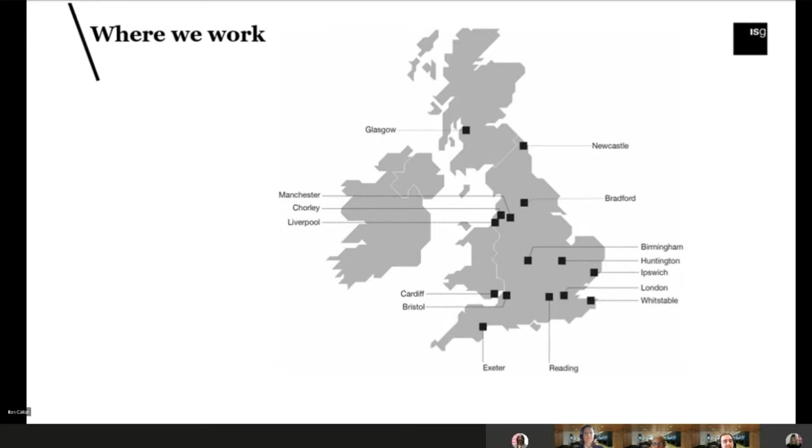So I'd like to hand over to my colleague, and I'll hand over initially to Ben, but we'll be taking questions at the end of the presentation.

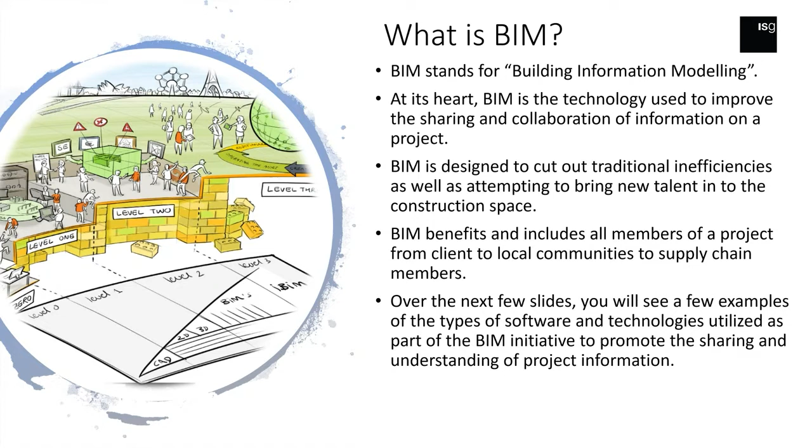So what me and Donatella are going to do over the next couple of slides is talk about some of the technology we use, how it talks with different software, the different technology we implement, and look at some of the fun side of construction. Construction isn't just this idea of muddy boots, concrete and bricks. It's developing into something a lot more technological, a lot more digital. And what I'm hoping over these next few slides is we'll try and showcase that. So Donatella, if you wanted to just kick us off.

Yes, of course. So as said before, we are trying to collaborate quite a lot with all the people that are in this construction process, and this is really the first step for us. So we are trying to design in a smarter way, definitely smarter than before, when we were using just papers or just 2D. And this is one of the main software that we are using.

That is called Revit. This is authoring software for design. So we put together the walls, the ceilings, the floors, and you can set up different things - the thickness of the wall, the levels, how many levels you have in a building, how they come together, and then you can always look at it in 2D and 3D. I think this is the magic of this software, because all the time you are drawing something in 2D, you can look at it in 3D and have a more comprehensive idea of what is happening in your design.

And this is a big revolution from the previous traditional design. Also, this is used as a collaboration tool, because more people can draw something in the same project. So we can have different files, and different files can work together in a smart way. They can synchronize with each other, and it is really working.

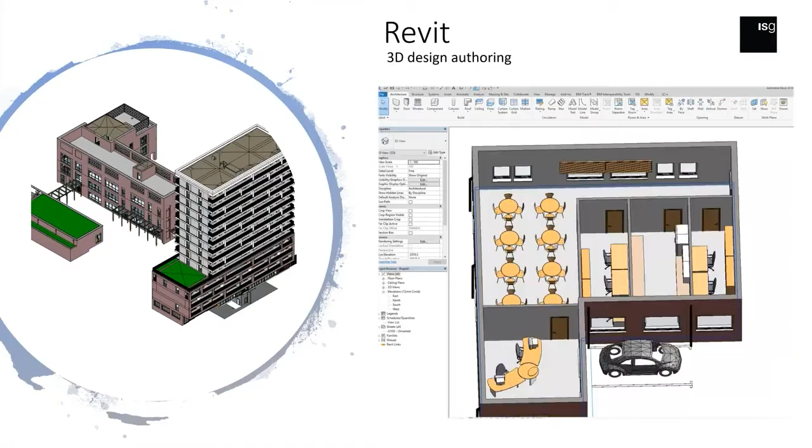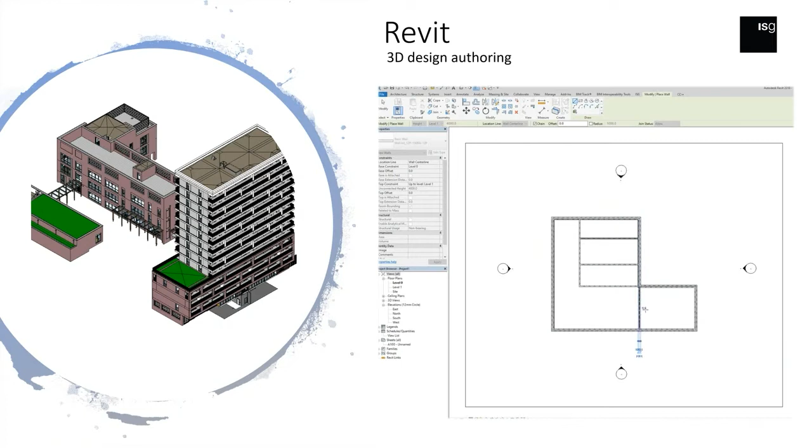We are trying to keep it up, the work in progress with these models. We share it with the whole team every week, so all of us are informed and there is not so much loss of time in the sharing, because before you had to post the 2D drawings or the big papers - on Friday you'd spend 2-3 hours just putting together everything on paper and posting it out. Now we are in a place where we can share all this information with a couple of clicks and 10 minutes of transfer.

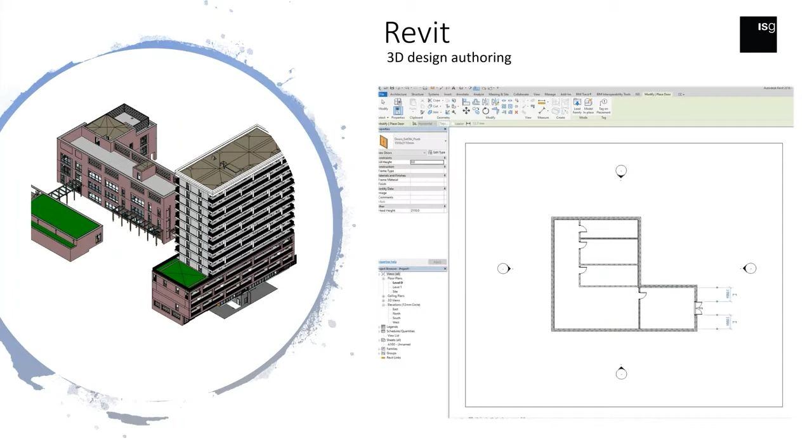And what else? Do we have anything? The video is finished. No, the video just plays more or less. I'm waiting for... do we share, do we show the 3D in this video? Yeah, it does, it drops at some point. It drops. Yeah, we get there. Yes, sorry, what were you saying?

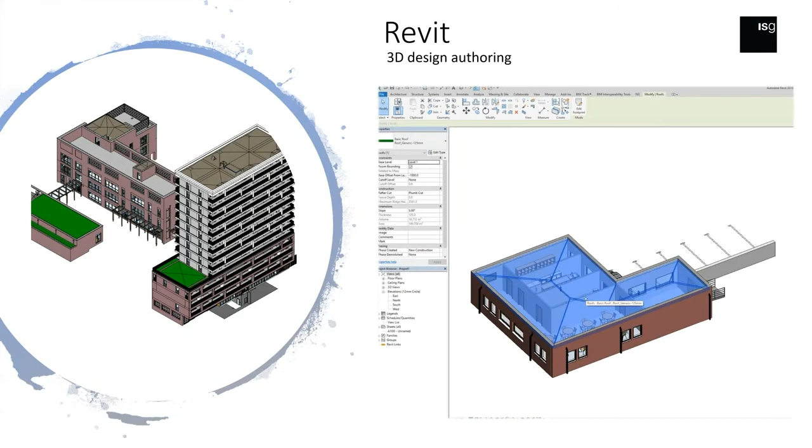I think it's also worth mentioning that we're showcasing this specific piece of software, Revit, and it's not to say that it's just main contractors that use this. Traditionally it's designers, so it can be architects doing the external look and how the internal feeling of the building is represented. It could be used by structural engineers to design the structural elements, how it stands up, how it's designed so it doesn't just fall over in a strong breeze, or how we can get mechanical and electrical consultants involved as well, looking at things like heating, lighting and ventilation. This is a type of software - I'm not saying it's the only one, there's loads of other software out there, but Revit is a typical example of how we can utilize 3D and 2D information to better visualize the project.

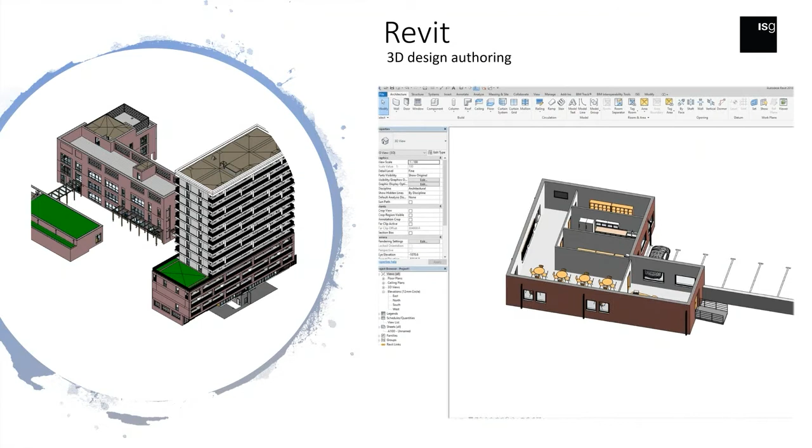And what the video was showing was essentially how we were drawing in the 2D space. However, at the same time, we're drawing in that third dimension as well, which opens us up to additional and a lot more capabilities around how we can use this information.

This is something that will come out later in the presentation, but we'll show a lot of software, and basically we have to learn different software and how they work with each other. We're showing this software because it's the most used for building, but if you're designing infrastructure, a long bridge or road, there are other products more applicable or most used in that industry. So the beauty of this is that we have to learn a lot of software, we're always learning something new. It's very challenging, and the fact that they work together in different ways is something we need to learn and understand. I found this one of the most fascinating things in this digital world. A big challenge for us, but very interesting.

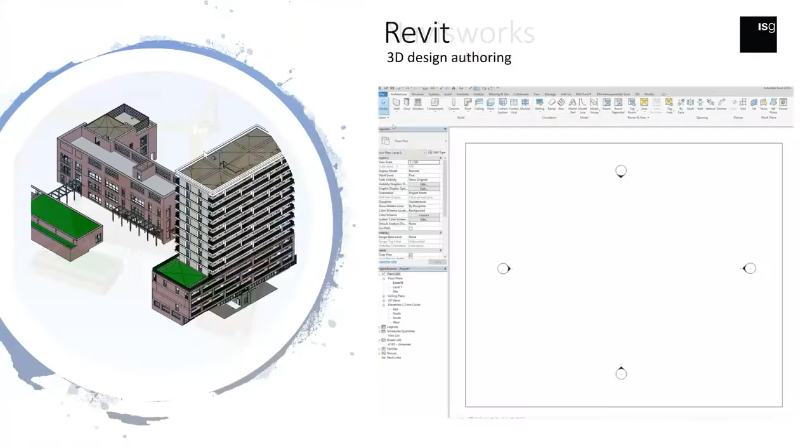That brings us on to, so Revit is predominantly the tool for how we can design in that 3D space, but then what we start to learn is how we can utilize that 3D design, that 3D information, that third dimension moving forward.

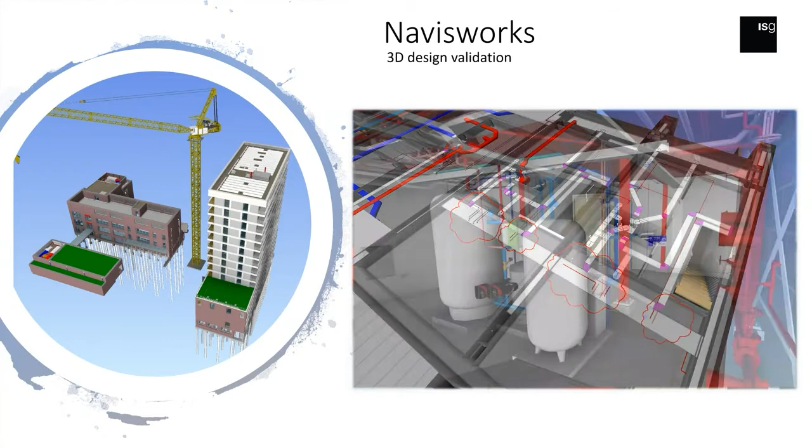Going back to the different disciplines on the project, you could have an architect producing a 3D model, a structural engineer producing a 3D model, a mechanical and electrical engineer producing a 3D model. You could have 10 or 15 different supply chain or subcontractors producing a 3D model. And what we're able to do is, like a big jigsaw puzzle, a 3D jigsaw puzzle, stitch that together to get a full view of the project.

This piece of software here, Navisworks, it's a little cartoony looking, but it does offer some benefits. We're able to take all the individual models from all the different parties on the project and stitch them together like a big puzzle. What you're looking at on the left-hand side is actually a series of lots of different models from all these different parties, and we're able to bring it together into one single space, this one single project.

So we've got this one single space, this single source of everything relating to this project. And what we're able to do is actually, utilizing that third dimension, fly through the model. Unfortunately we haven't got a video, we've got a series of images just to portray this, but we're able to fly through this model and visualize the design in 3D.

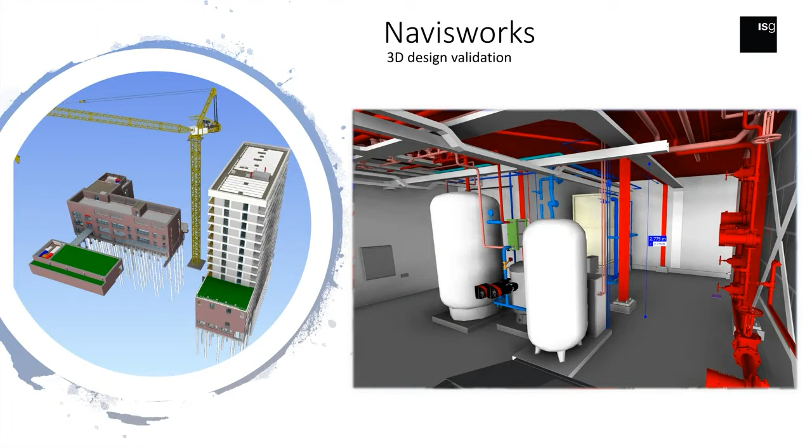Now, if you can imagine, not everybody on a project is proficient in reading drawings, understanding how buildings are made, or what certain pieces of equipment are. Certainly with our clients, trying to design with them, to develop the project with them, to get them to interpret and understand what they're physically going to get at the end can be quite tricky. So what we're able to do, utilizing this software Navisworks, is bring all the information together and visualize the design in a 3D space.

This 3D design, we can then go in and interrogate, query bits and pieces, raise issues and say, no, that shouldn't be there, it should be over there.

So what we can do with that is highlight back to the designers who are designing the pipe work and say, Mr. Engineer, can you drop your pipe work to run underneath that beam, or can you move it in a different position?

And what it enables us to do is interrogate in that 3D space and really get into the finer detail of looking at everything in one area, one space, one model, one project. People are a lot more receptive to understanding the third dimension than they are perhaps the 2D, which is the traditional 2D layouts, 2D plans, drawings that most people are familiar with on a project. So that's a key technology that we utilize.

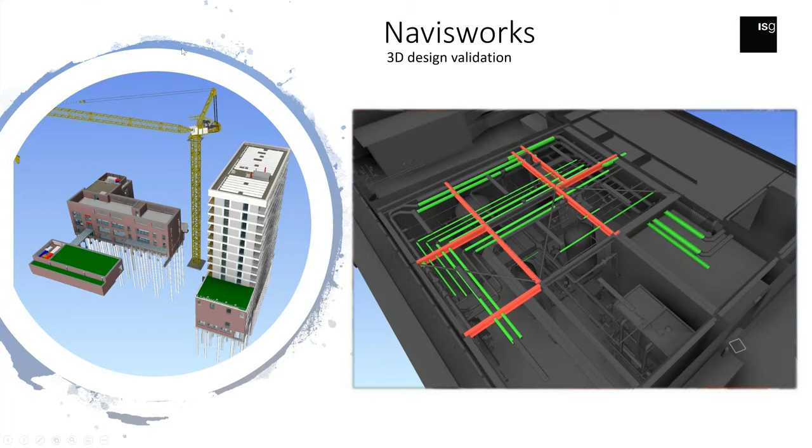Okay, so in terms of program, the program is the time program, where we do have a planner per each project putting together a time program for the project. Before, there was really a very big graph with bar graphs. And it's still kind of difficult to understand to me.

I mean, it's not difficult, but it's still like a lot of bars and you have to read through it. But if we put together what we call 4D, where the fourth dimension is the time, we use the 3D and try to put together the time with the 3D, assigning to each part of the building a specific construction time. So if we know that on that week we are going to put the pile down, we assign this in the 3D. This software is called Synchro.

This is allowing us to put together the program with the 3D. When we assign the set of objects to this time frame, we can have a video showing us how the elements are coming together on site. This is a brilliant tool that we are using also for logistics.

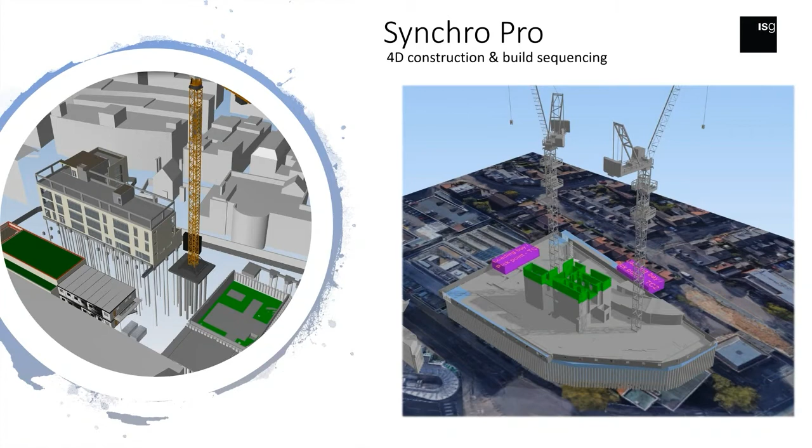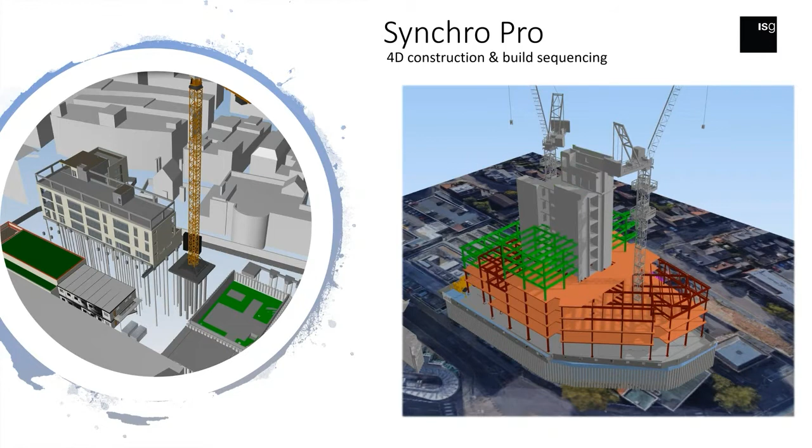So you have been seeing that there are cranes in here. There is a big operation for us on site that's written on the program, but on the bars it's not really coming together -- I mean it's there, but it's not that understandable. And then we have a lot of spatial clashes that in the program are not really something calculable. We have other plans going on too -- we can assess how we get into the site, if there is a lot of traffic, how we can make sure that all the tools are fitting, all the plants are fitting, that they can turn around.

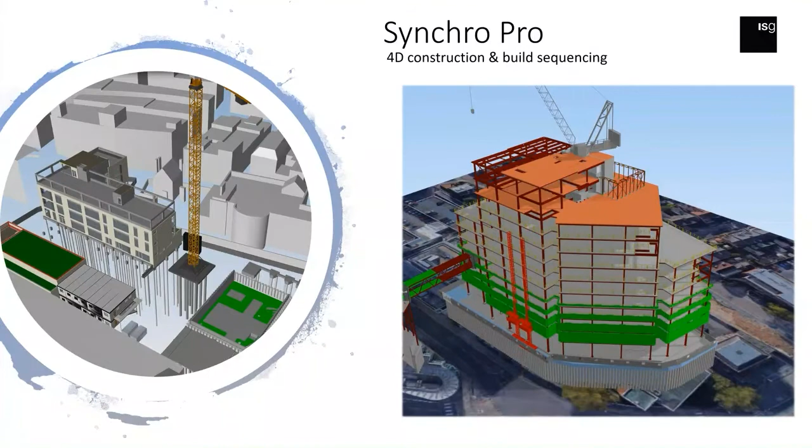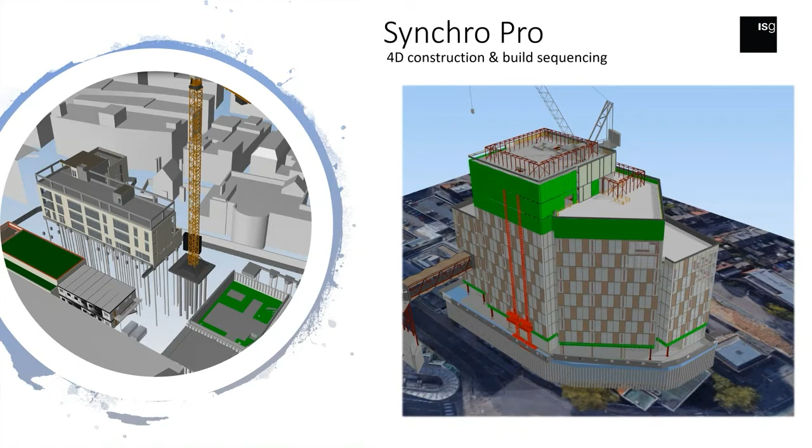We have enough space to store the materials around. We build up this video where we can see what is working and what is not working. Sometimes we have a spatial clash that we look at -- it's in the program but you don't see it because it's not evident. But with the video in place, all this perception is changing completely, because you see it, you look at it, and you understand it in the first place.

Either for the client, this is a very important tool, because there is a typical case where the bar graph doesn't say anything to us, but then when we show all our stakeholders this video, also the neighbors -- we use it a lot for neighbors -- to explain what is happening, why we are making all this noise on site, why you see all this material coming in and out.

We are very happy to show this and share it because it gives a great understanding of what we are doing, and we are working quite hard to make it right. This is a typical thing that clients really like to have, and it allows us to do our job a bit better.

I think the last bit about the 4D is not that easy, because the video and the technical bit is easy for us, but putting together all the needed information is a long operation, because we need a lot of input.

We have a planner working on the time program, but this is just a set of different information. How many plants do we have on site? How many people do we have on site? How many subcontractors are working on site at the same time? Each subcontractor will have a different time program. So actually we are putting all this information together.

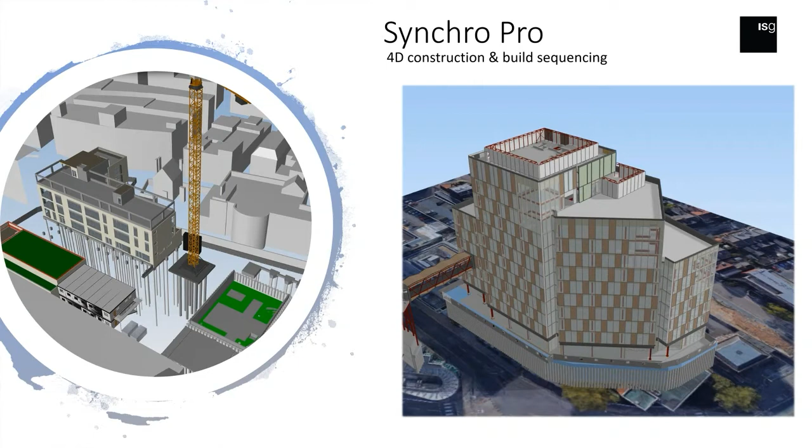The next piece of software we utilize, and some of you might recognize on the right hand side what that building is, is called Autodesk ReCap. This is a very intelligent, smart process, but essentially what you're looking at on the right hand side is a combination between the 3D model we showed earlier, the federated model, and what is called a point cloud scan.

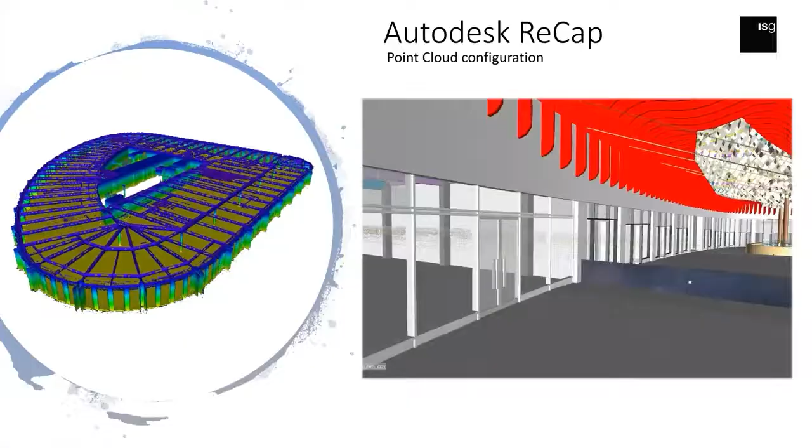A point cloud scan is essentially a build-up of what you can see on the left hand side there - sorry, getting a bit pushy pulling people around the screen. What's on the left hand side is actually a build-up of millions and millions and millions of small points. Each point is a pixel basically, and it's a build-up and a way in which we can capture on-site conditions.

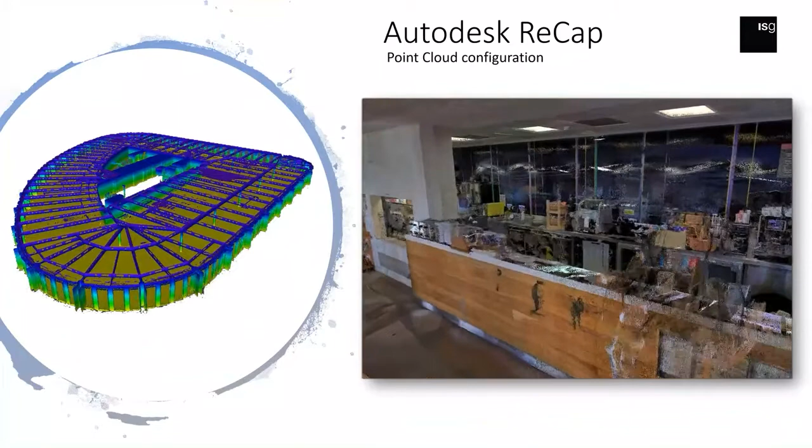To put it into perspective, a main contractor such as ISG might win a project from a client whereby we have to go out and fit out an internal space. When we say fit out, we mean that the structure has already been installed, the facades, so the glazing and the windows has already been installed, and the main structural core in the middle, the structural frame, has already been installed. So then we just need to go in and do the internal fit out - putting up walls, doors, furniture, installing floor finishes, ceilings, that sort of stuff.

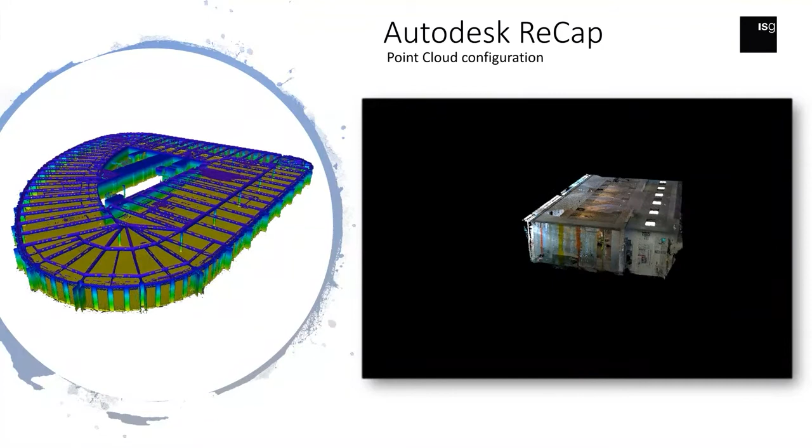What this software enables us to do is go into a building that we haven't built. We don't know how it's been captured. We might not necessarily have the information from the previous contractor who built it, but it enables us - I'll just replay that video again - it enables us to go in and capture a live representation of what that building is.

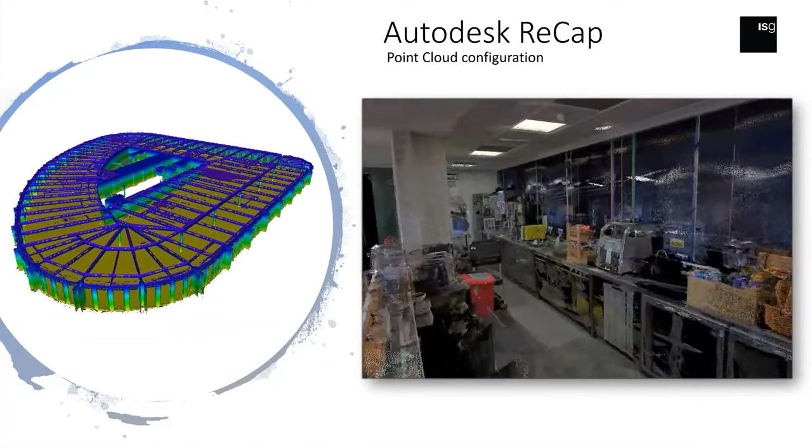What we're able to do with that is base our design upon the point cloud we've produced, because we know the point cloud is accurate, since we've gone out and picked it up and scanned it. It enables us to be a lot more accurate and have a lot more assurance around what we're designing actually going to work, because we know that's what's been captured on site.

Now, the actual technology itself, the process you follow, and what's shown on the screen on the right hand side is actually our canteen in the Aldgate office that we went in and did a scan of. The actual process is you take a tripod with a laser scanner attached on top, set it up and click go, and then for 5, 10, 15 minutes, however long, it will spin on the spot 360 degrees and shoot out lasers.

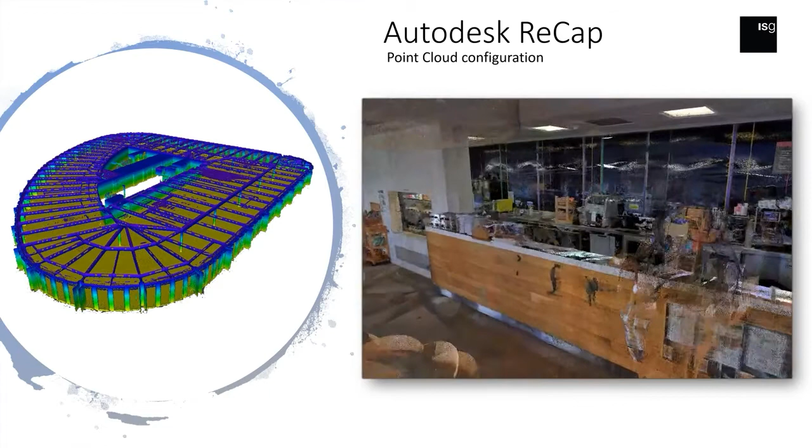And what it will do is it will calculate the time it takes between when it sends out the laser and when it bounces back after reflecting off a surface. And that's how we build up this mass of points.

So this scanner is spinning around 360 degrees and shooting out all these lasers, and we're starting to build up this mass of points, this point cloud data. Eventually we do enough scans and we get to a situation like this one here, where we can build up and actually capture a full scale scan of the building.

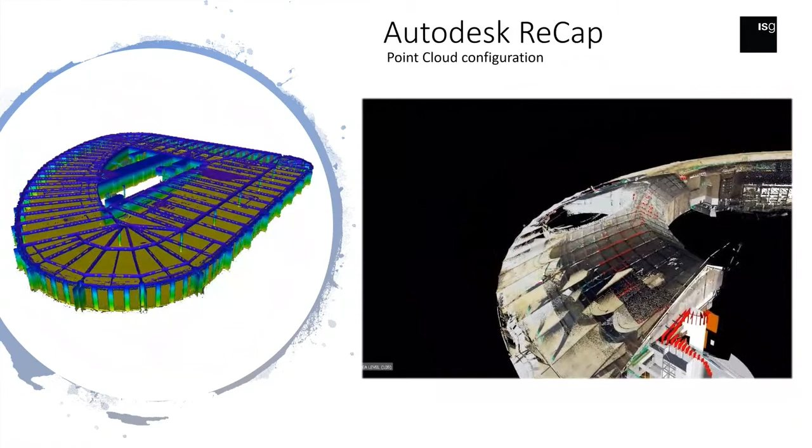Now on the right there is actually the second half of the O2. ISG did the fit out for the retail side of the O2 building, which some of you might have seen. As we're flying through, if you've been there, you'd recognise we've got these massive structural supports holding the canopy up.

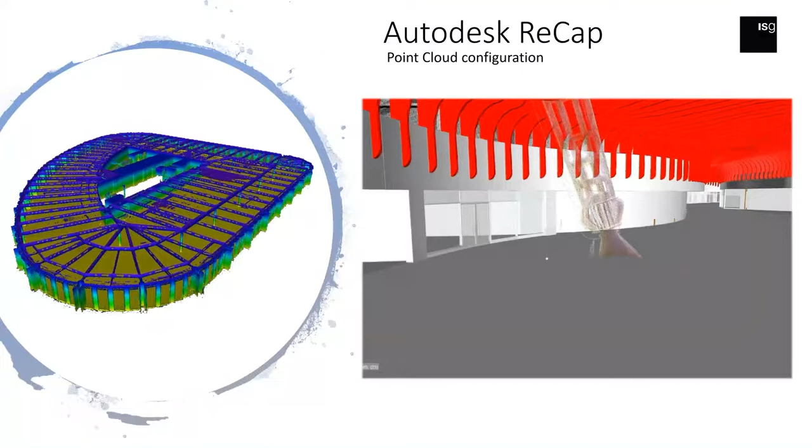What we actually did is we went out and scanned it, and then we were able to implement that into the model, and design around where these structural supports come in, giving us a lot more certainty. We do this exercise during design so that we don't have to do it during construction, so construction can go a lot more smoothly and be more streamlined, picking up a lot of these issues during the design phase.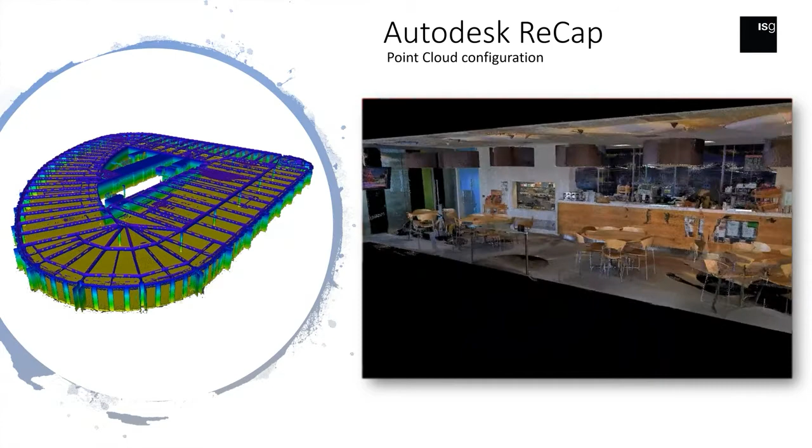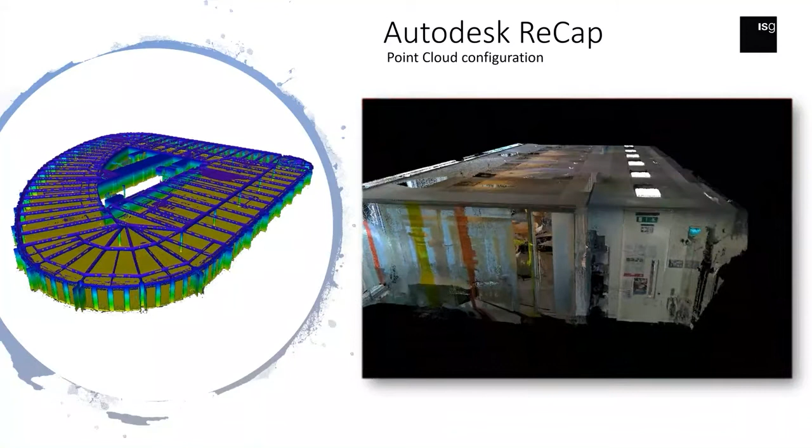It's a very intelligent piece of software, a very intelligent process for utilizing this information, to the point where a laser scanner itself can cost anywhere between 30 to 80,000 pounds. It's not cheap equipment, but we do have that in-house at ISG, and more companies are starting to realize the benefit of this technology because it saves time, saves cost due to potential changes further down the line, and it's easier to interpret.

So it's not just software to visualize what's already there on site, it's there to develop the design, make it better, do multiple iterations of the design, and ensure that what we're actually designing is fully aligned to what's on site. So again, we're getting to that construction phase and resolving issues before getting to site.

This is again a bit of a gateway. There's loads of other potential use cases for this type of information. The point cloud itself we're showing in its quite basic form, just overlaying it in a model, but there's a lot more intelligent stuff that goes on behind it as well. So there's a massive industry for this sort of stuff, and it's almost created a new role in itself.

We traditionally have surveyors that go out to site to set up certain bits and pieces, but in the last few years a new role has emerged, a laser scan engineer or laser scanning surveyor, whose primary job is to just go out and laser scan buildings. There's a lot of processes and the way you scan that needs to be considered, like it doesn't deal very well with glass or reflective surfaces.

So you have to take that into account. You have to move around the building, and work out how best to stitch all the laser scans together like a big jigsaw. So it's developed into a new role itself, which is quite an interesting concept, and it's being utilised constantly throughout the business now. But it's something that's only come into fruition in the last 5 years or so.

I think the software or technology has been around for a while, but actually utilising and implementing it within construction has certainly picked up in the last few years, because we're also talking about millimeter accuracy here. When we capture these conditions on site, this building, we're capturing it as accurately as 1 or 2 millimeters, which is tiny, absolutely tiny.

So it's very accurate information, and people are starting to jump on that, because for the sake of getting somebody to go out and scan it, we're actually saving money down the line. We're spending a little bit of money at the beginning of the project to get this information produced, stitched together and overlaid in the model. But then we're not spending money 6 months, a year, or 2 years down the line when we come to construct the thing, because we've already validated what's on site.

Anything to add? Yeah, a little things. I wanted to say that from the software point of view, we are showing this ReCap - ReCap is the software we use to see and look at the point cloud. But the technical software the guys use for laser scanning, to open the point cloud, put it in the right location, and set up the coordinates, etc., are other software. Sometimes they are specific to the machine being used, and sometimes there's other software for setting up the point clouds. Again, we have a lot to learn there - it's a proper job, a proper career in laser scanning.

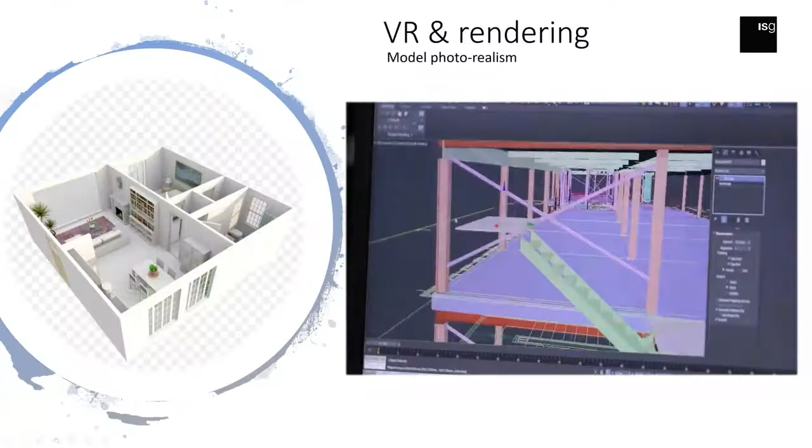And on to another interesting bit. Donatella, do you want to run through this? I would say this is the coolest part. I'm happy to have it.

So virtual reality - I'm sure most people on the call know what it is. You've probably seen people wearing the goggles, looking at black stuff, and actually being in another dimension. I think there was a need for the client or users to understand how it would feel to be in this space, whichever it is - a school, a hospital, a leisure center, as you can see.

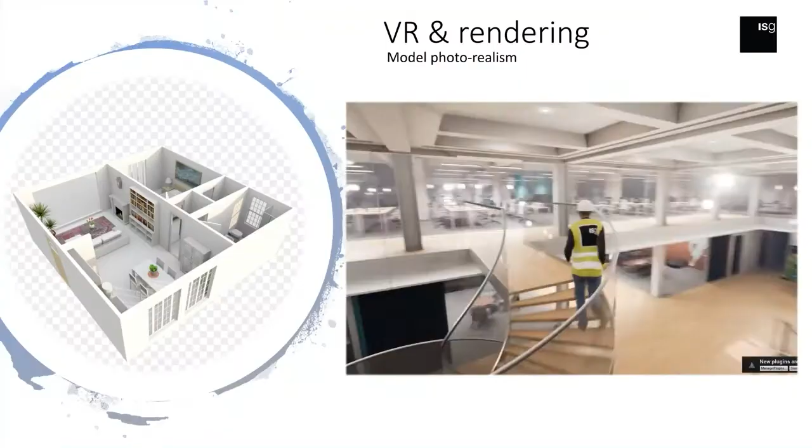Clients and users, future customers, were asking: can I walk inside? Can I touch the kettle? Can I move in the kitchen to understand how it works? Can I be on the balcony to see the panorama for real? And the answer really is - yes, you can.

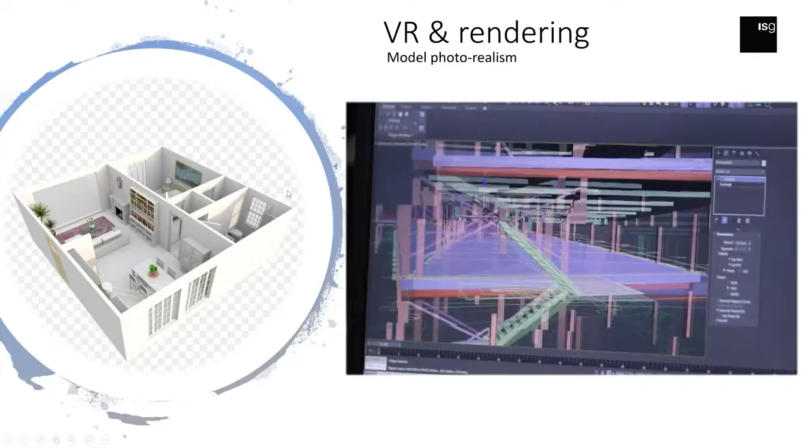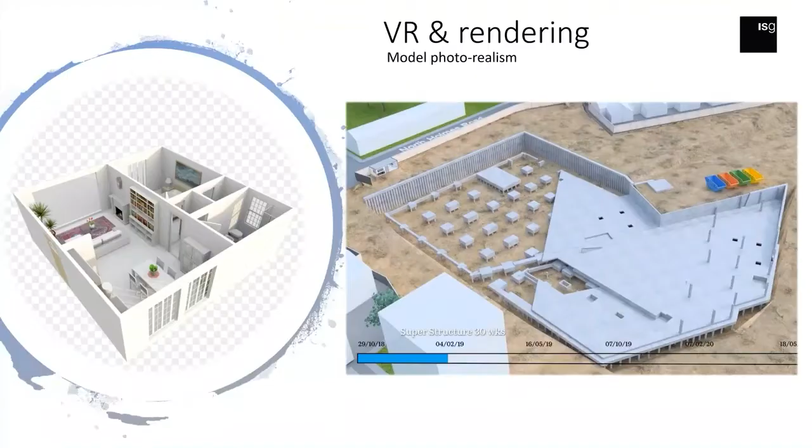So we take the 3D we created for the project and put it together. We actually make this walkthrough - but it's not just a walkthrough. We make the texture nice, make sure the colors are right, and this really gives the client the feeling of being inside the space, inside the built environment we're going to deliver. It's a fantastic tool for them to understand if they like it, and at the end of the day we want them to be happy with the space we're creating.

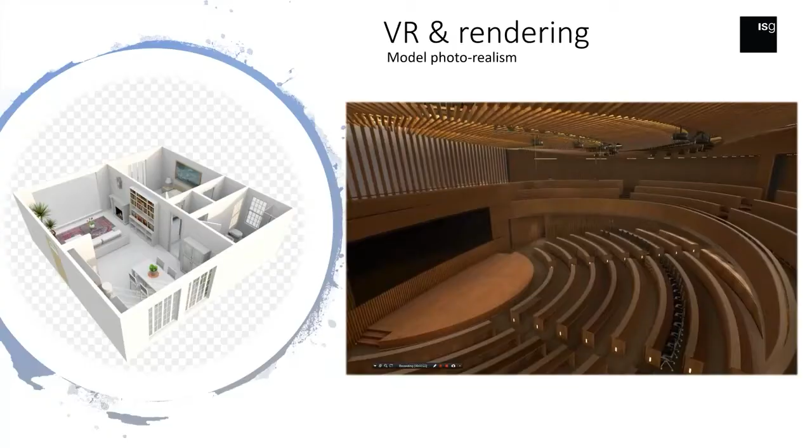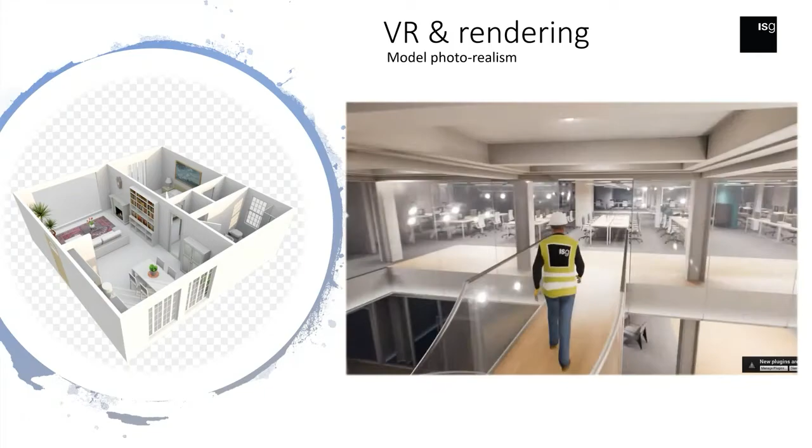This is like fit-out, a specific case where we want to make the client happy to be there, to live there, to use the spaces. With schools it's the same - we want the kids to be happy about having yellow on the wall, rather than black or dark gray. There are situations where we want them to use the space and be happy.

In technical terms, we're using different software again - usually gaming engines where we put the 3D model. It's not us specifically, because we're more about managing the process. We're not creating the virtual reality, but another part of our team is. They take the 3D models that we or the designers create, and they put these into the gaming engine.

Do we know which engine they're using? Yeah, the examples showing on screen at the moment are derived from the Unreal Engine, which is already pretty much all pre-programmed in. It's just a simple case of dropping the models in, putting on a few materials and textures, and then creating some interactions.

This jumps back to something we talked about earlier - these new and emerging roles are actually finding a place within construction. We at ISG actually have games developers employed through ISG for this exact reason. The world between construction and game development is obviously massive, but construction is starting to see these similarities and links between the two, and we're starting to utilise this.

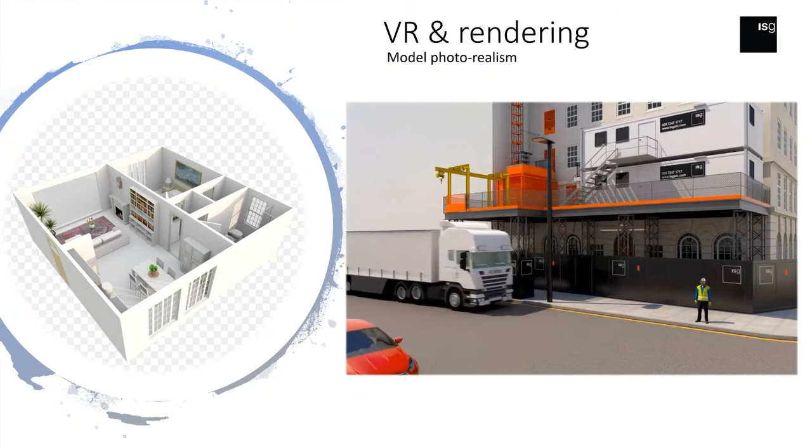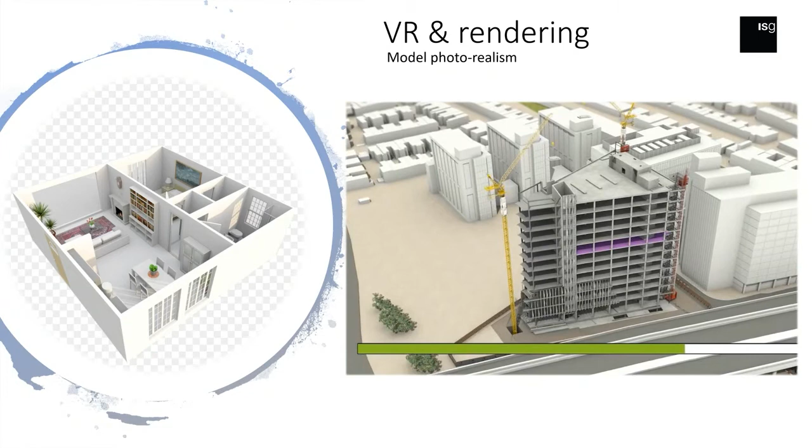It's not new technology by any means, but they're starting to implement the technologies that are out there and available for new processes within construction. So thinking away from the traditional roles of a planner, a construction manager, a project manager, and some of the more boring roles, they're looking towards implementing roles like games developers and programmers and planners - there's all these new bits and pieces.

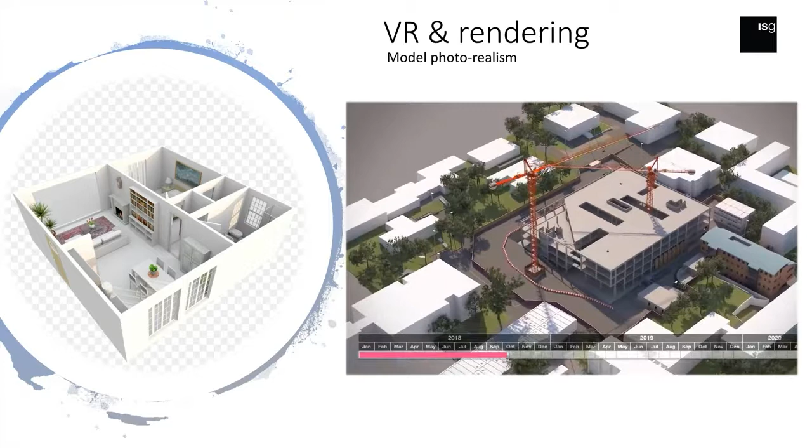I think now what we are trying to do is the same thing we were doing before, but with a different approach or a different tool.

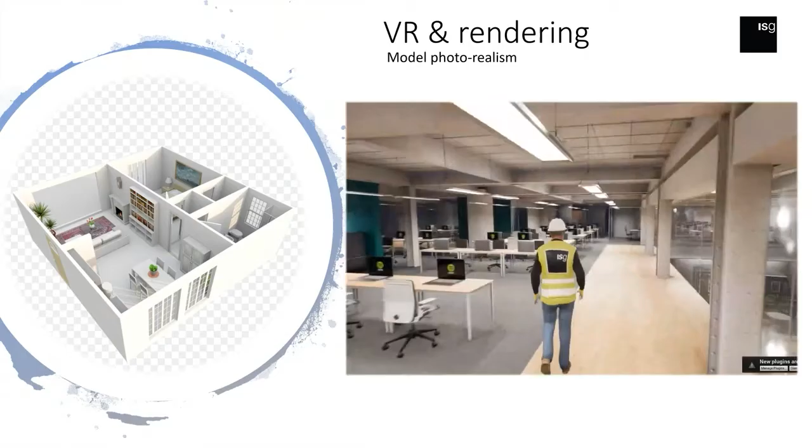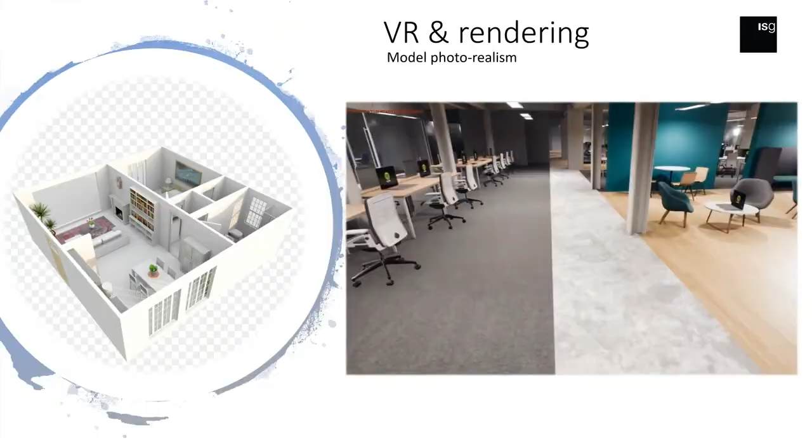So this is creating efficiency, but also what I wanted to say is that there is the reason why we are looking for these new minds, also people coming from other industries, developers. A lot of data are involved in these processes. So we are working with people, they are working with data, they are creating databases.

We are really looking for another way to discover again the construction and make it better. So it's not just having the traditional design manager, the traditional architect, the traditional MEP engineer. We are looking at the same things but trying to make it work, and sometimes we need different expertise, different background, or different experience to get there. It's not just us talking about construction all the time.

Definitely. I'm just going to carry on because I'm a bit conscious of time.

All I really wanted to do for this last 5 minutes is talk around some future-gazing stuff. A lot of what we just looked at over the past few slides is kind of the norm. When we talk about BIM and technology within construction, that's where we're currently at. We've got 3D design, 3D validation, interlinking program with 3D models, point cloud data, VR virtual reality, and the rendering side. But just looking ahead to where the industry will be in perhaps 5, maybe 10 years, and what individuals looking to go into the construction space in the near future can expect to come out of that.

Really, the future is all based upon data - how we can utilize data to better deliver projects. As an output from that, we can look at things like robotics, automation, and all these other potential aspects. I wanted to quickly fire through a couple of slides to show where the industry is at the moment, what they're trialing, and what they're potentially looking at rolling out.

This was a case study quite a while back, essentially looking at exoskeletons - utilizing these built-in pneumatic suits to assist with heavy lifting. Instantly through that, it's less stress on the actual workforce itself, looking at implementing technologies to better assist in the day-to-day of how people deliver projects. A typical example being an exosuit, an exoskeleton vest, whatever it might be.

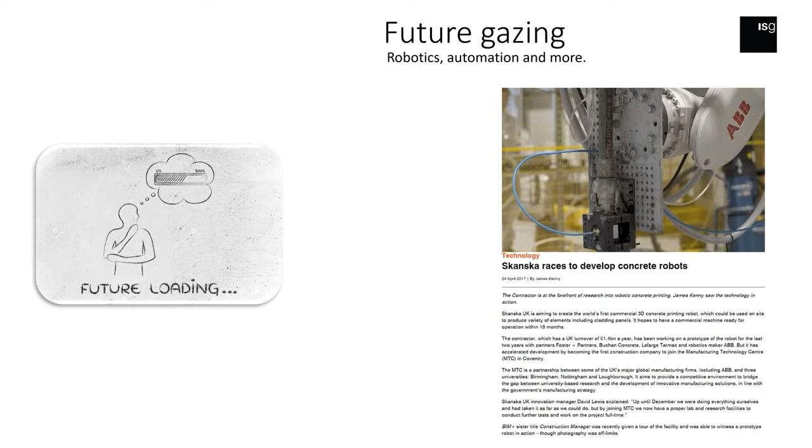Similarly, concrete robots - I'm talking about essentially 3D printing concrete structures. Having these devices set up to replace the manual approach to pouring concrete, the traditional old way of bringing it over by crane, pouring it in and letting it set. There are actually robots out there that they're looking at trialing and developing to make this process automated.

Similarly with bricklaying - these traditional ideas of construction with bricklayers, mixing concrete, and all this old traditional approach. But actually, where we're pushing as an industry is to automate all this. So 10 years down the line, 20 years down the line, whenever it might be, we're not going to have bricklayers - we're going to have a robotics engineer who actually manages the bricklaying robot. And it's those new roles that potentially open up within the industry through this development of technology.

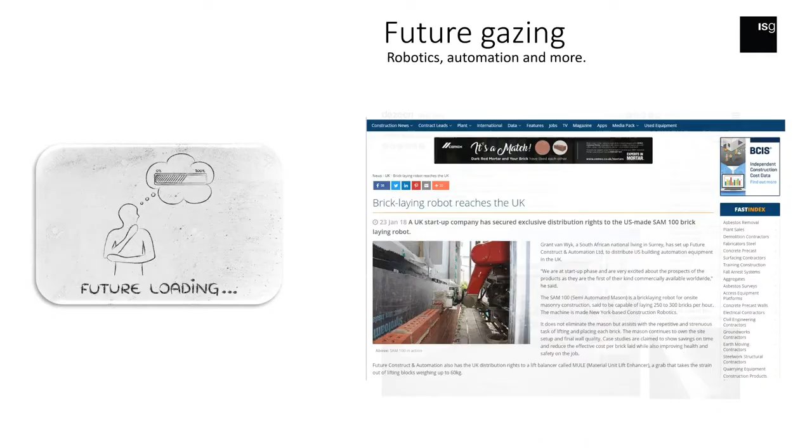Another example is 3D printing. We've got capabilities in-house to do 3D printing, albeit not to the extent of the example shown on the screen, but 3D printing elements. So rather than going out on site and installing it on the fly piece by piece, we can actually 3D print it off-site, have it delivered to site already installed, and just drop it in.

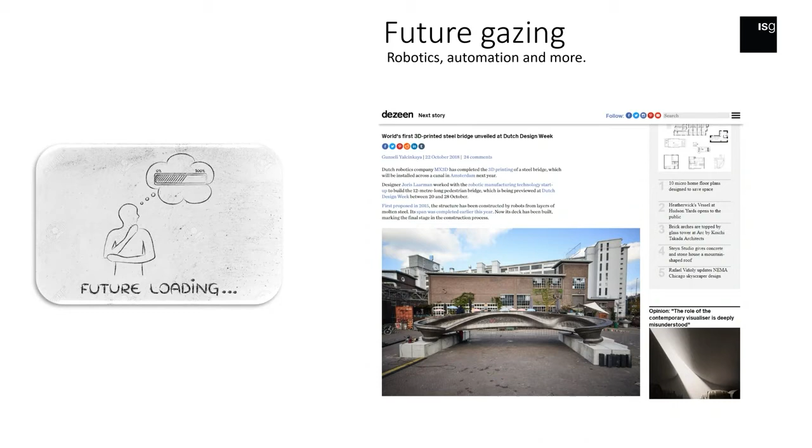This is a typical example of a 3D printed steel bridge that was printed in, I think, Amsterdam. It was like the first major 3D printed structure they had done. And again, this notion of 3D printed homes - I know there was some talk of some Western countries doing it somewhere out west.

Can we do it? Is it feasible with the advancement of technology? Several years down the line, yes, it might be. But it's all these new and existing ideas that are coming into construction that will streamline how we traditionally deliver a project, and it's those kind of technologies I think we want people to take away from - turning less from a people-focused construction to a more robotics and automated off-site fabrication process.

It's all becoming a lot more intelligent, which is opening up a lot more opportunities, a lot more new roles coming into the industry, to the point where Skanska, who are one of our main competitors as a main contractor, have actually employed robotics engineers themselves already. I haven't got it as an example here, but they've got different pieces of robotic equipment in-house that they utilize on their sites.

And what was it - the Boston Dynamics, the old Spot the Dog thing, I can't remember the correct name of it. It's all that kind of technology that we can expect to come through into the industry in the next however many years. So it's something well worth having a look at and investing in, but keeping your mind open that there's this potential, this capability to implement those skills within construction.